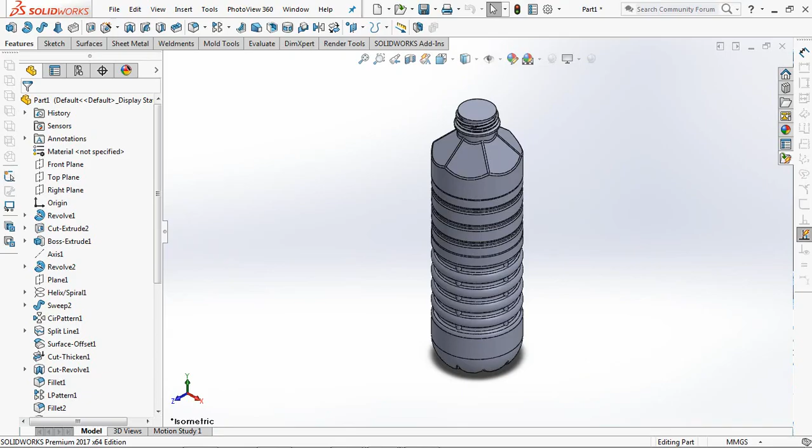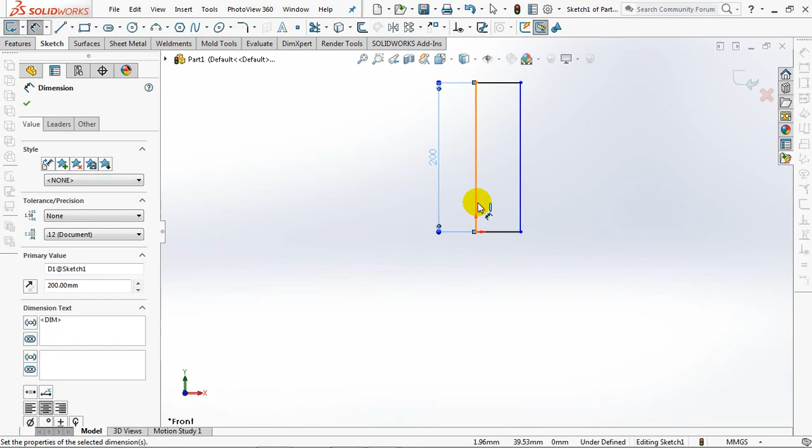Let's get started. On the front plane, choose revolved boss, then create a rectangle. Set height at 200 millimeters and width at 33 millimeters. Change the vertical line at the origin to a construction geometry.

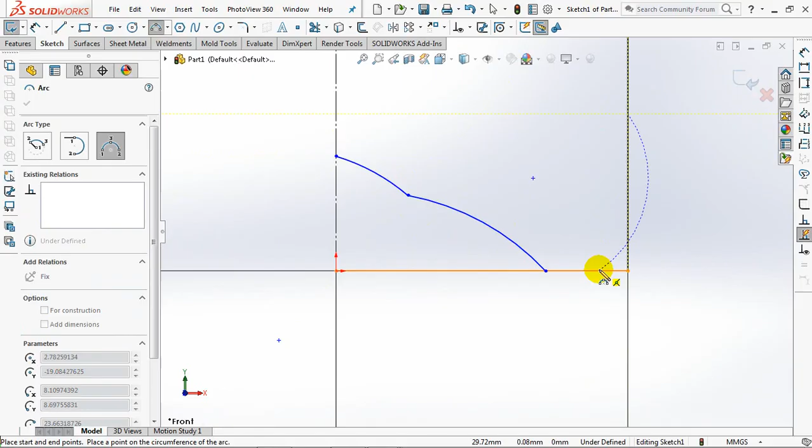Then create an arc profile. Trim some lines. Use the add relation command for arcs and lines to be tangent or coincident.

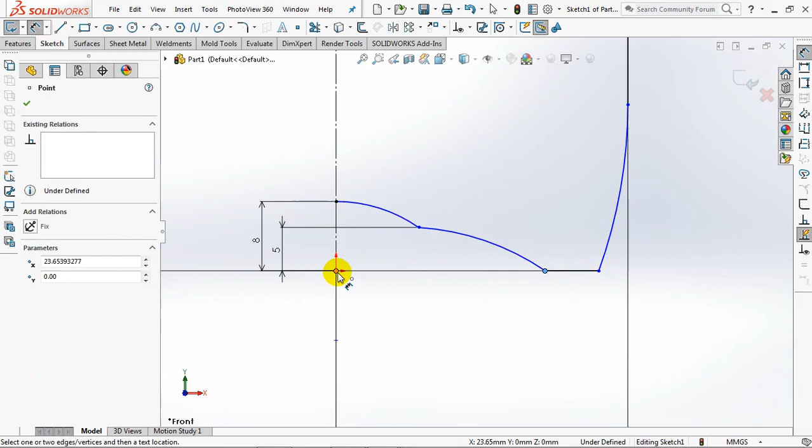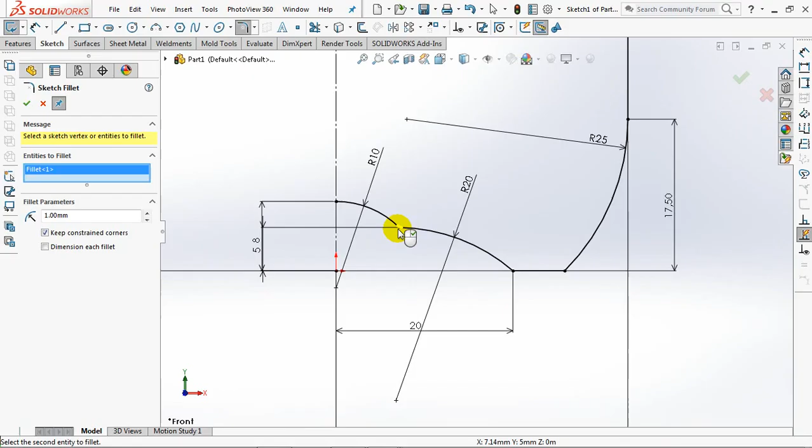Set dimensions at 8 millimeters, 5 millimeters, 20 millimeters, 17.5 millimeters. Radius 10 millimeters, 20 millimeters radius, 25 millimeters radius, as well as the respective fillets, 1 millimeter and 2.5 millimeters.

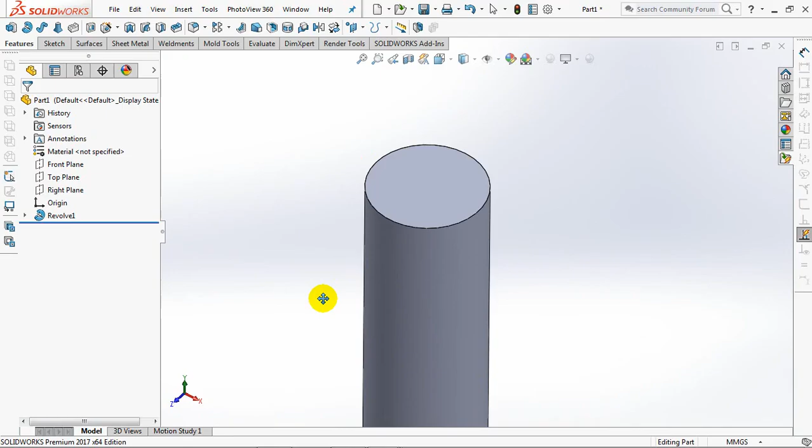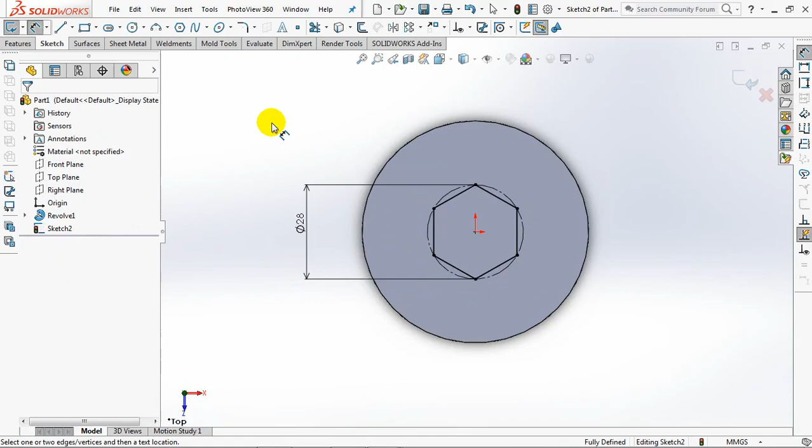Select extruded cut on the top surface. Create polygon profile. Check circumscribed circle, make vertical, set dimensions at 28 millimeters. Exit sketch, select through all.

Check flip side to cut. Click draft angle, set the angle at 45 degrees. OK.

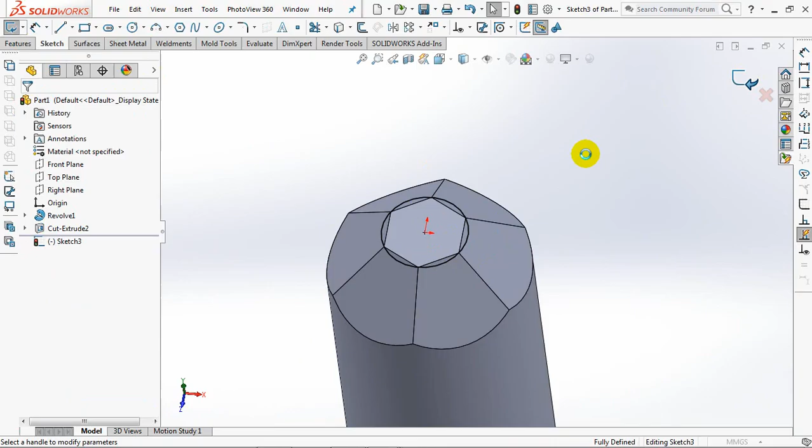On the top surface, select the extruded boss. Sketch a circle 28 millimeters in diameter, then exit sketch. Set depth at 18.5 millimeters. In direction 2, select up to next. OK.

Create an axis. Click the front plane and right plane. OK.

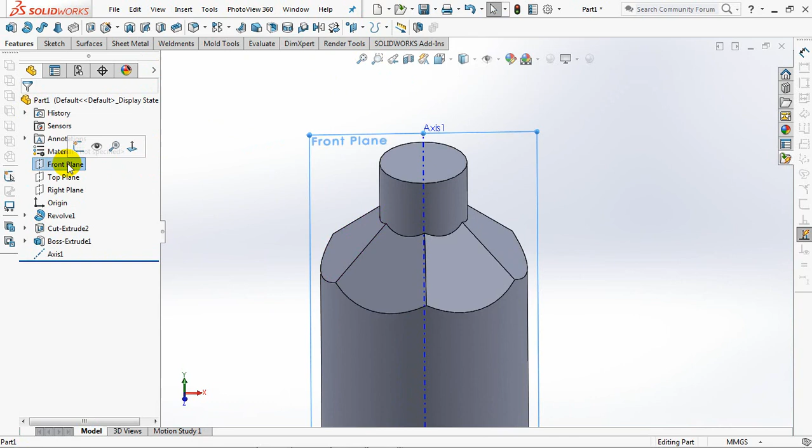Click the front plane, then choose the revolved boss. Create line sketch profile.

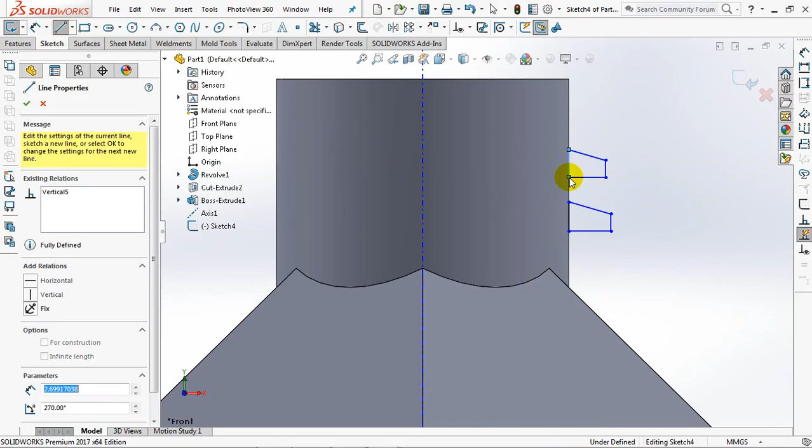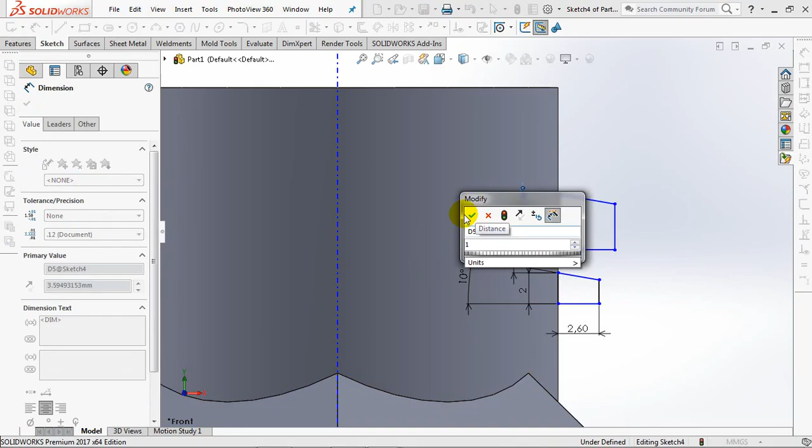Set dimensions at 2 millimeters, 2.6 millimeters, 10-degree angle, 1.5 millimeters dimension, 1 millimeter, 1.6 millimeters, 12.5 millimeters. Exit sketch, click axis as axis of revolution.

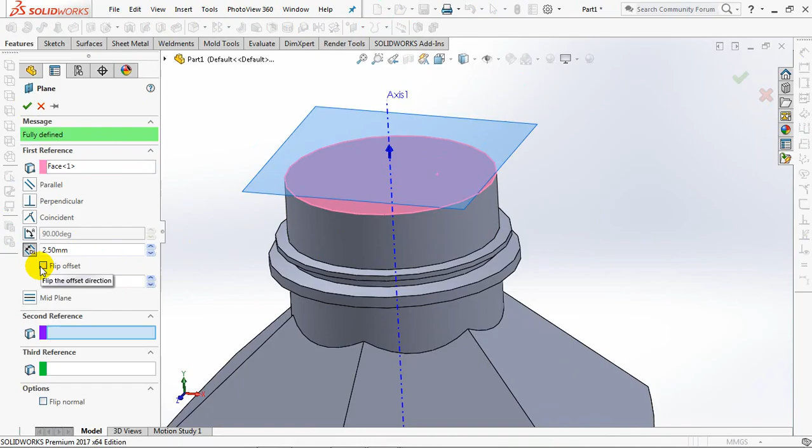OK. Create a new plane on the top surface with a distance of 2.5 millimeters. Then create a helix on the new plane.

Make a circle with a diameter of 25 millimeters. Exit sketch. Check variable pitch. Set region parameter to 8 millimeters pitch, 8 millimeters pitch, 0.05 revolution, 28 millimeters in diameter.

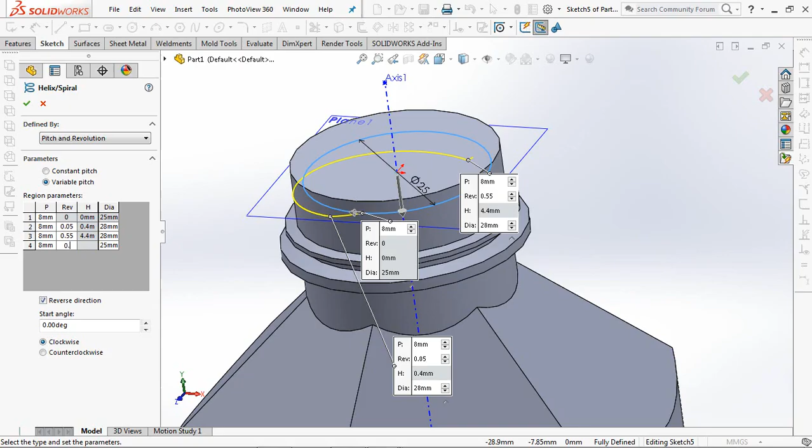8 mm pitch, 0.55 revolution, 28 mm in diameter, 8 mm pitch, 0.6 revolution. OK.

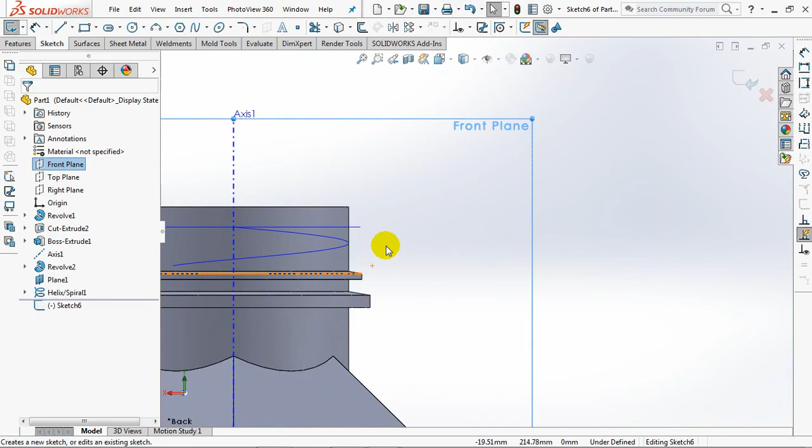Then create line profile on the front plane. Set 60-degree angle.

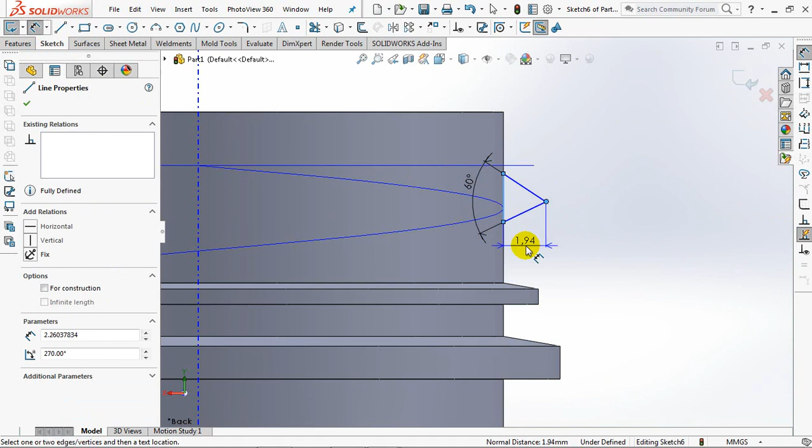1.6 mm wide, 3 mm high, and 1.9 mm thick. Set fillet at 0.25 mm. OK and exit sketch.

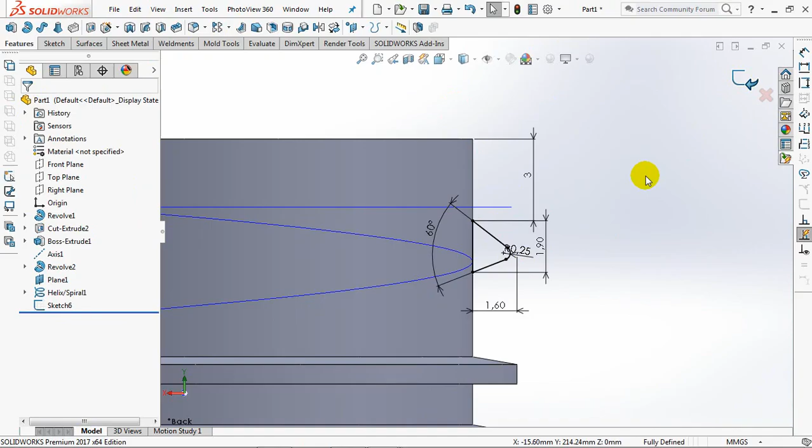Select Sweep Boss. Then click Sketch 6 and Helix Path. Click Bidirectional. OK.

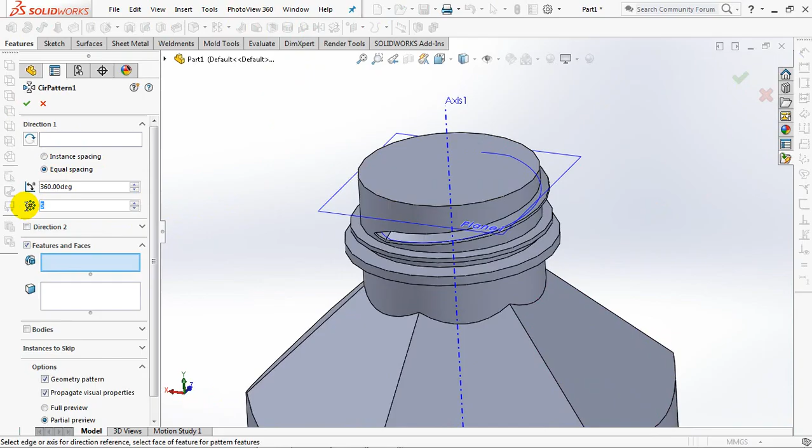Choose a circular pattern, number of instances is 3. Click Axis 1 as pattern axis. Click the Sweep 2 feature. OK.

Hide plane 1, and hide helix. Create a line sketch profile for the split line on the body surface. On the front plane, draw a rectangle.

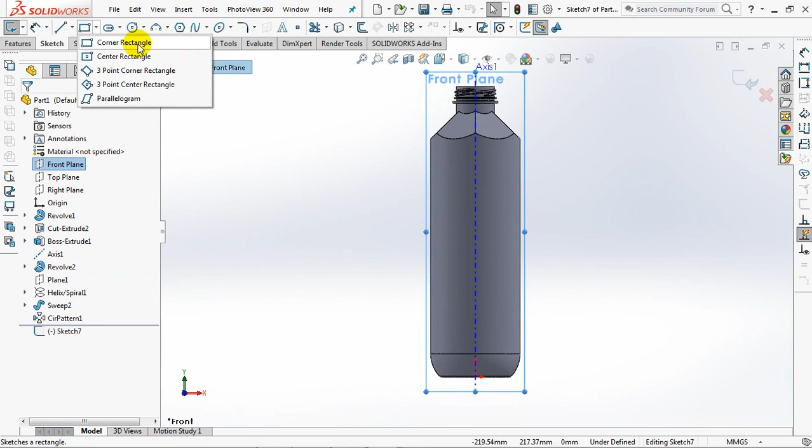Set dimensions at 40 mm and 50 mm. Convert the vertical lines to construction geometry. Exit sketch. Select split line.

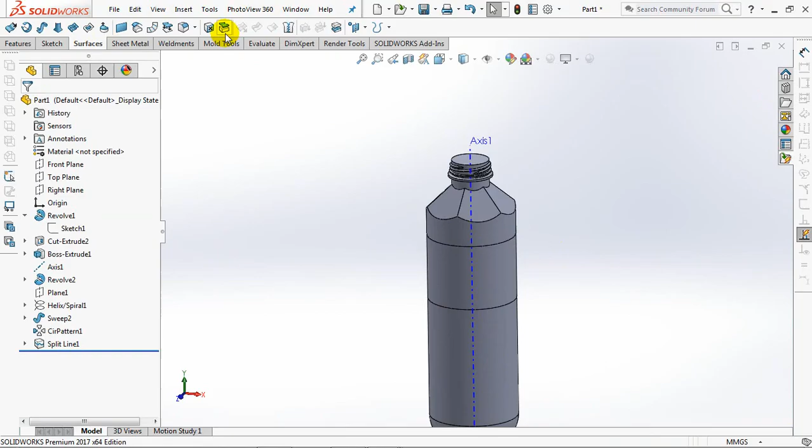Then click the body surface. Offset surface at 0 mm. Then thicken cut at 0.25 mm.

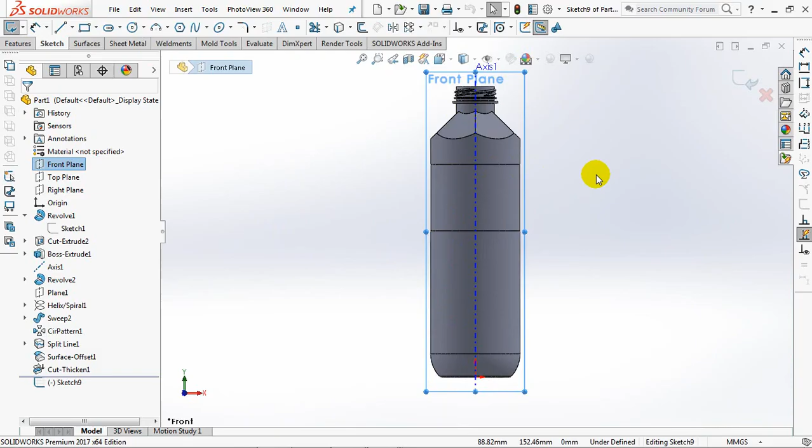Make a revolved cut command on the front plane. Then make a profile of the isosceles triangle line.

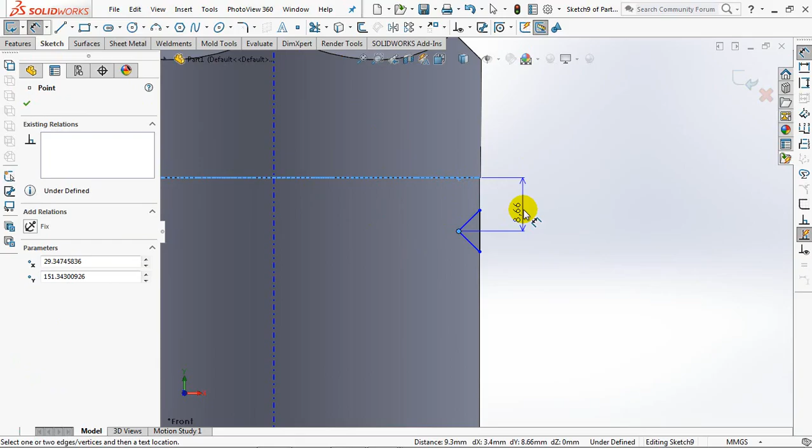Set dimensions at 10 mm, 1.9 mm. Fillet 1 mm. OK and exit sketch.

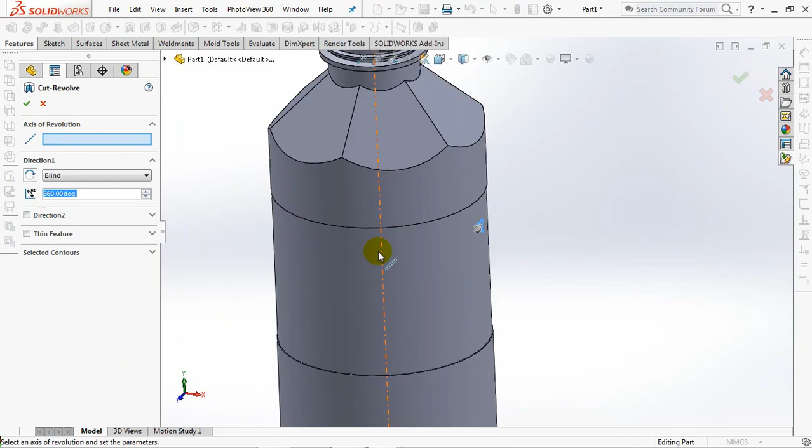Click Axis 1 as axis of revolution. OK. Set fillet at 2 mm. OK.

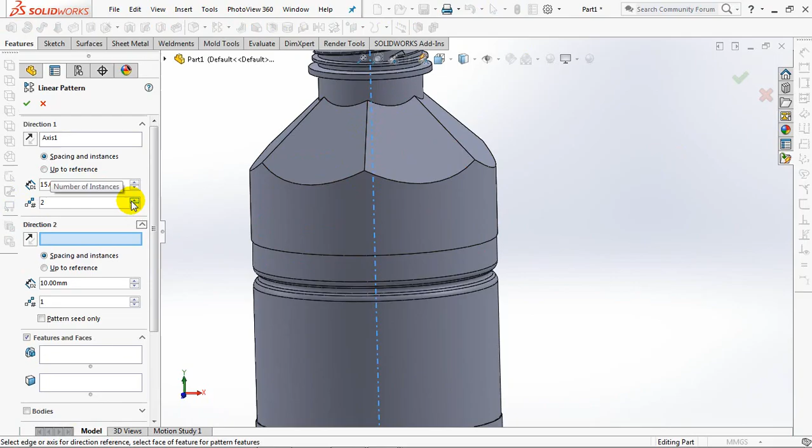Select linear pattern. Click Axis 1. Set spacing at 15 mm. Click the Cut Revolve 1 and Fillet 1 feature. Number of instances at 3. OK.

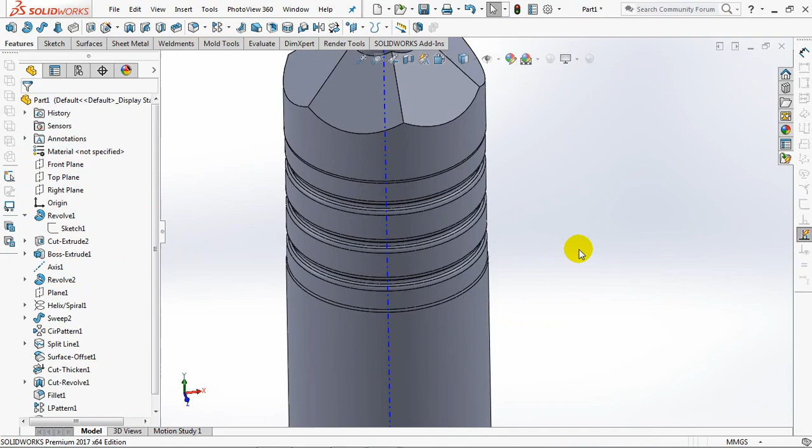Set fillet at 2 mm. OK. Set fillet at 3 mm. Click Edge, then choose Right feature.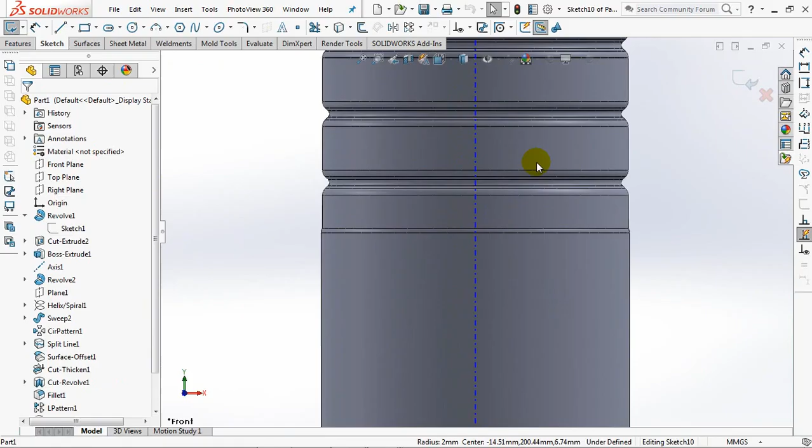OK. On the front plane, select Revolved Cut. Create a triangular profile.

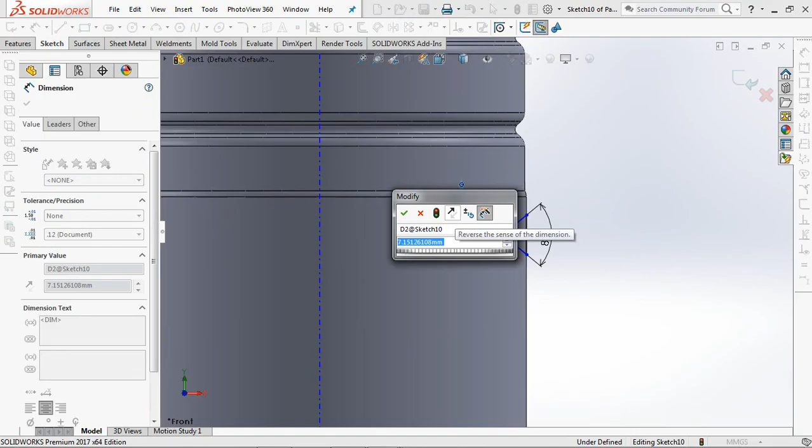Equal. Set the angle at 80 degrees. Set height at 15 mm, width 5 mm. Fillet 2 millimeters.

OK and exit sketch. Click axis 1 as axis of revolution. OK.

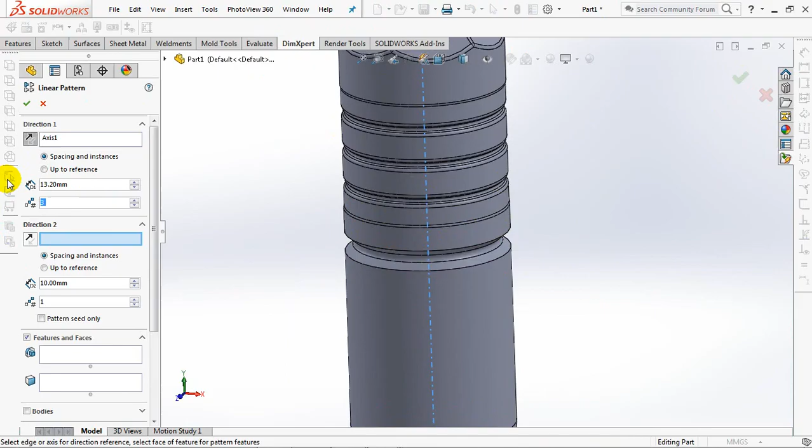Select linear pattern. Click axis 1. Set spacing at 13.2 millimeters. Number of instances at 5. Click the cut revolve feature 2. Click reverse direction. OK.

Set fillet at 4 millimeters. OK.

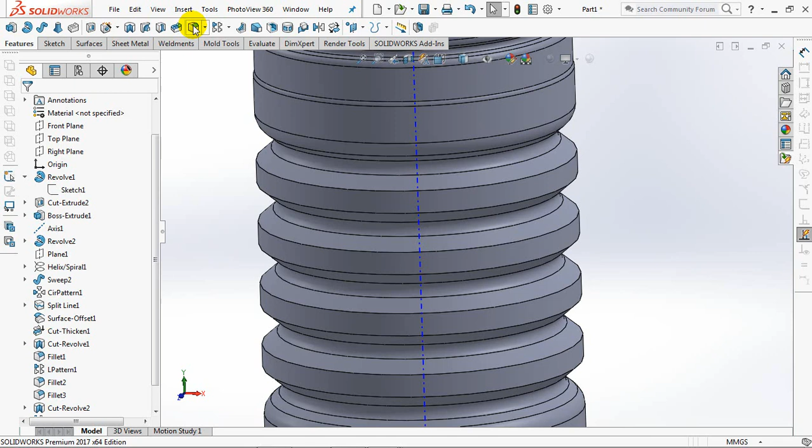Then select fillet, and choose full round fillet. Click each item to fillet. OK. Repeat the fillet command for the remaining 3.

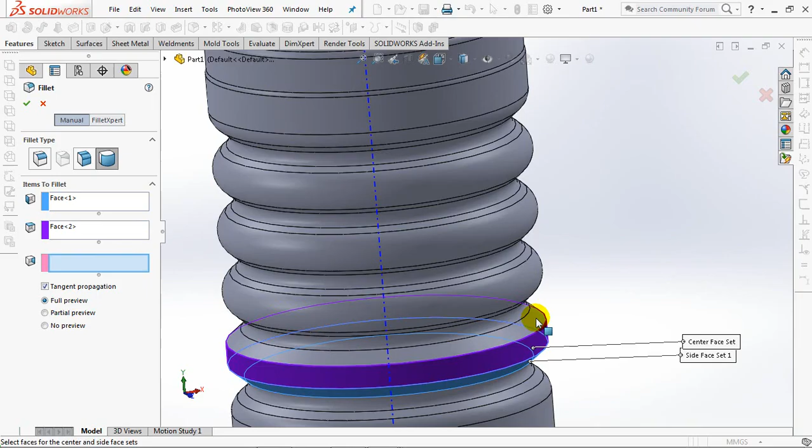Create a path profile on the front plane. Show profile sketch 1. Offset entities at 2.5 millimeters.

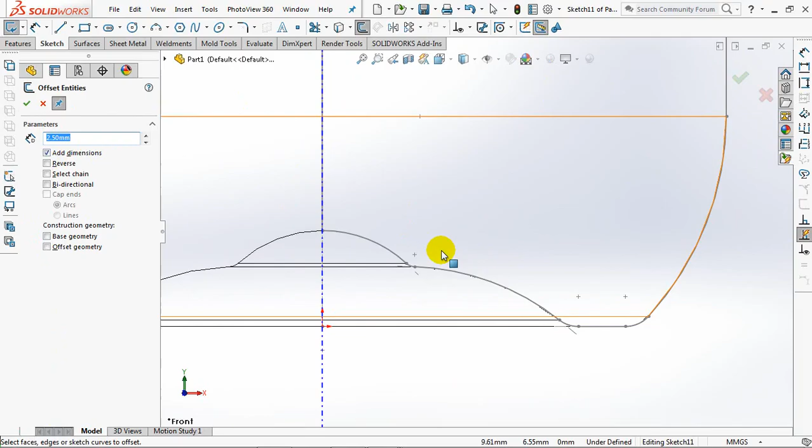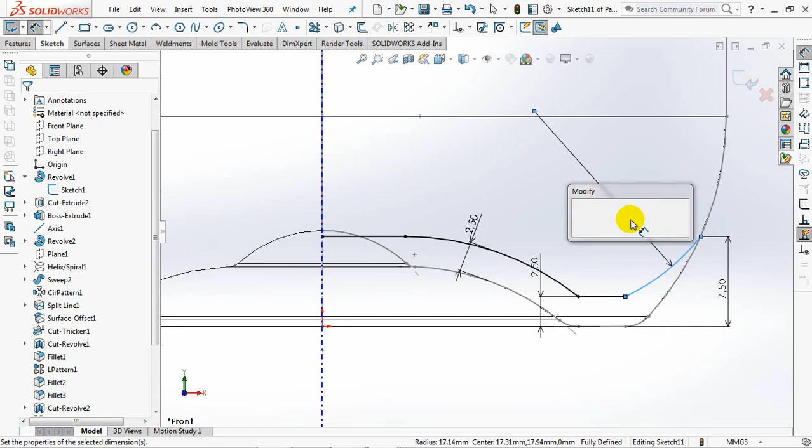Sketch an arc, then sketch a horizontal line. Set dimensions at 7.5 millimeters, 15 millimeters radius. Fillet 1 millimeter. OK, then exit sketch.

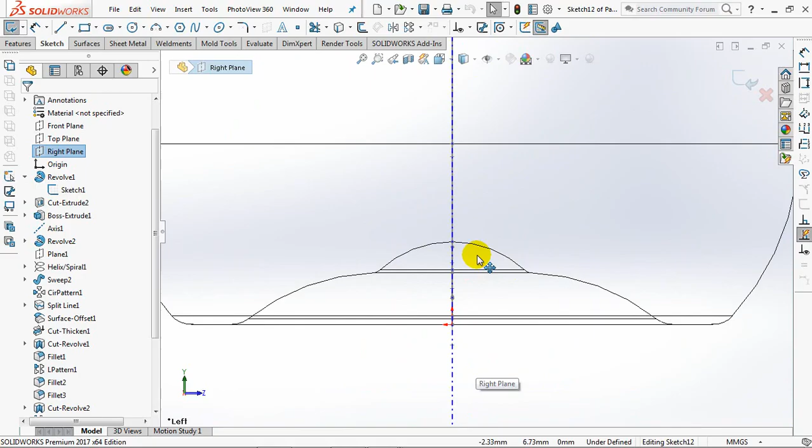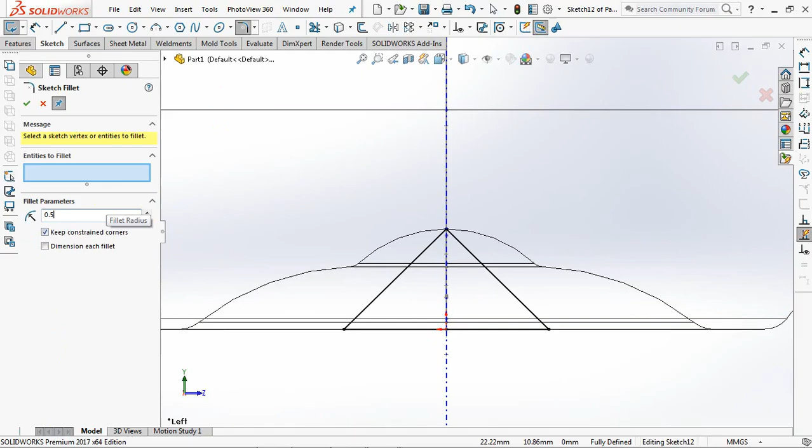Create an isosceles triangle profile on the right plane. Equal. Set fillet at 0.5 millimeters. OK, exit sketch.

On the feature toolbar, select Sweep Cut. Then click the path for Sketch 11. OK.

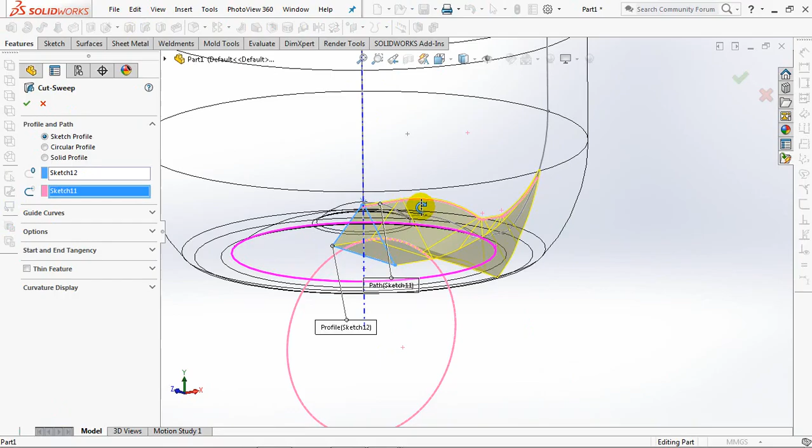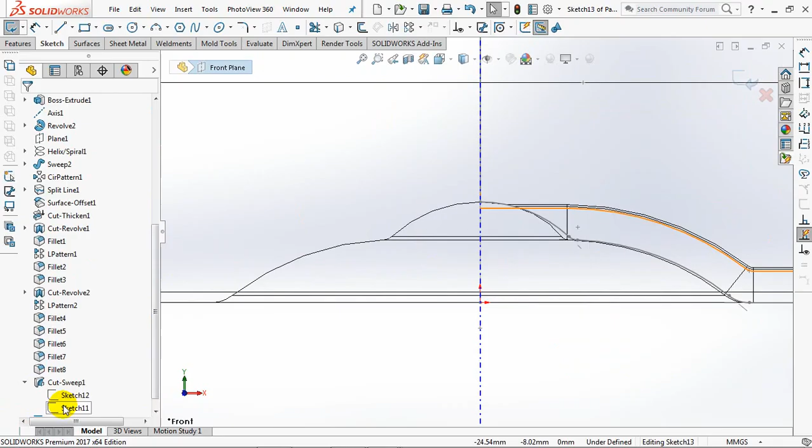Create another path profile on the front plane. Click Sketch 11, then select Convert Entities. Create the center line as the mirror axis.

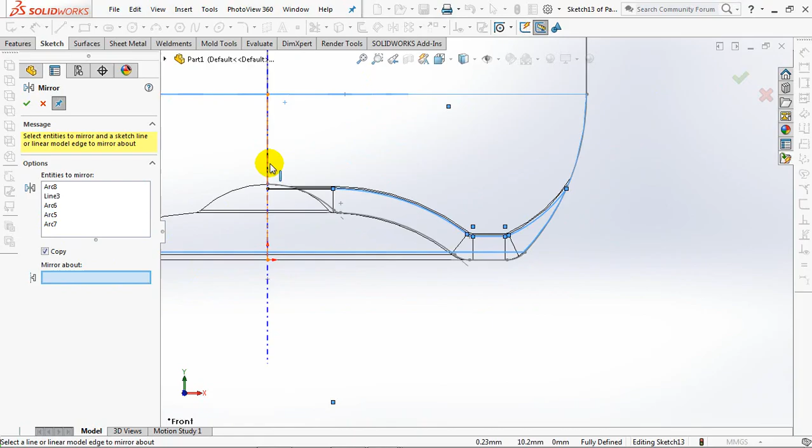Choose the Mirror command. Click Entities to mirror. Then click the center line as the mirror about. OK. Change to construction geometry.

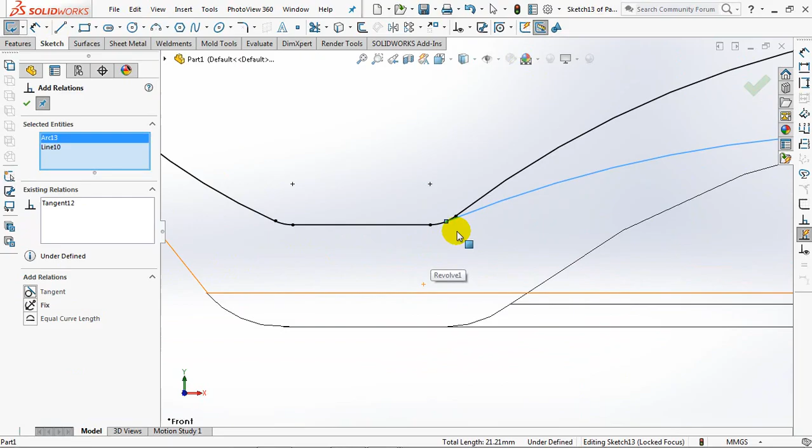Sketch an arc and lines. Add relation, becomes tangent. Set dimensions at 5 millimeters. Trim to closest. OK and exit sketch.

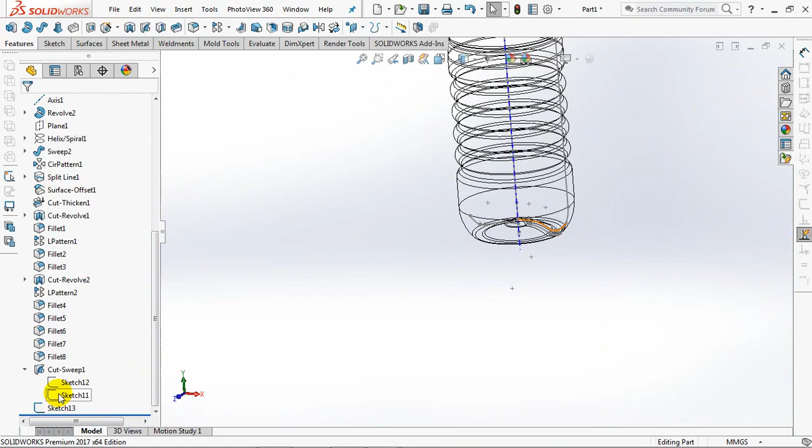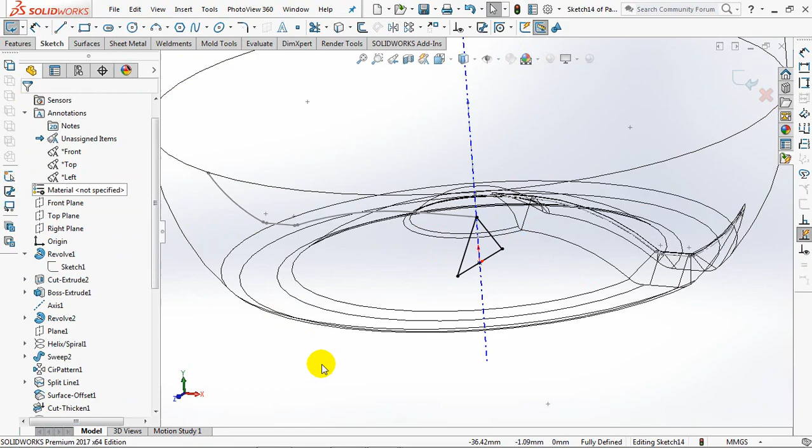Create an isosceles triangle line profile on the right plane. Set 0.5 millimeters fillet. OK, then exit sketch. Choose a sweep cut. Click sketch 13 as a path. OK.

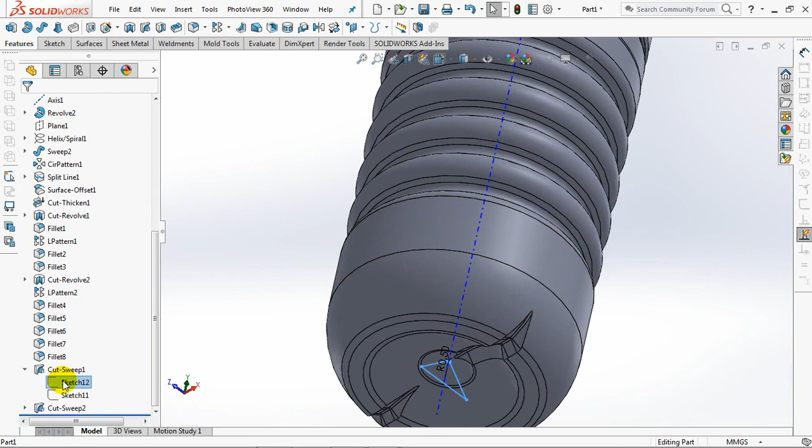Show sketch 12. Then create a new plane. Click the first reference and second reference. Set the angle at 55 degrees. OK.

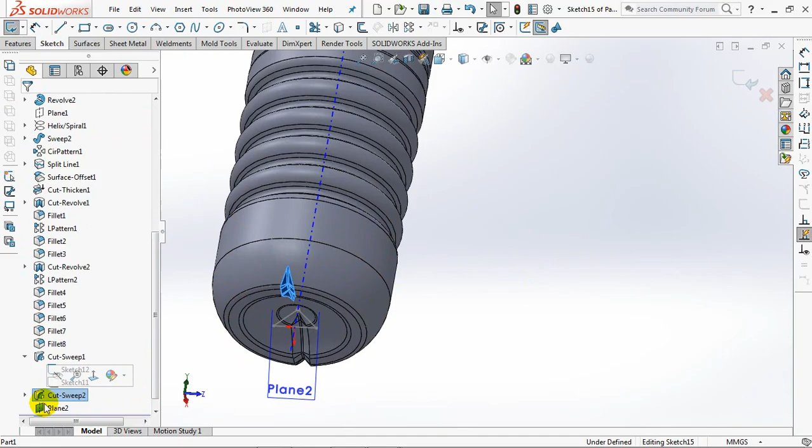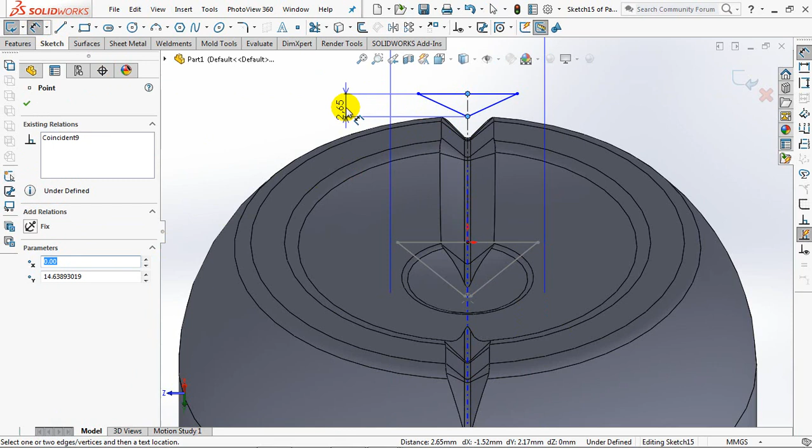Create a profile on the new plane. Centerline and line. Set dimensions at 2.65 millimeters, 150 degrees, 15 millimeters. Exit sketch.

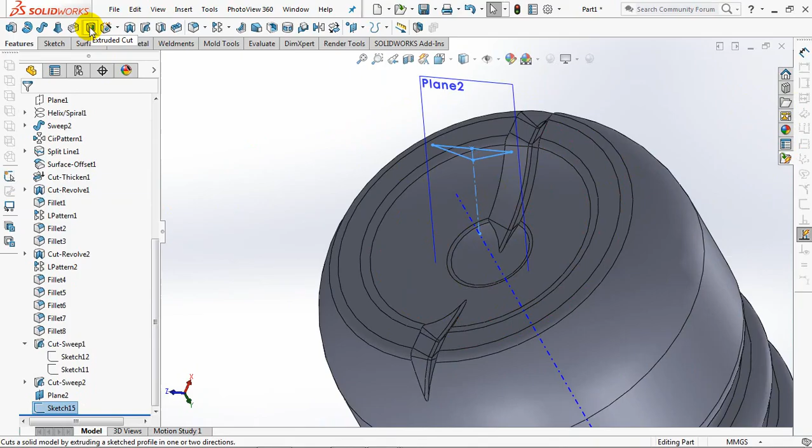Click sketch 15, then select extruded cut. Choose through all. OK.

Roll back. Choose a circular pattern. 5 instances. Click the cut sweep 2 and cut sweep 1 features. Click axis 1. OK.

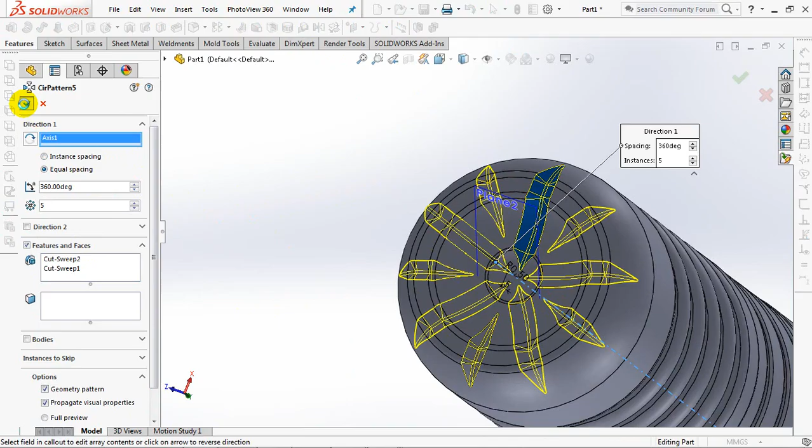Roll to end. Then choose the circular pattern again. 10 instances. Click the cut extrude feature 3. Click axis 1. OK.

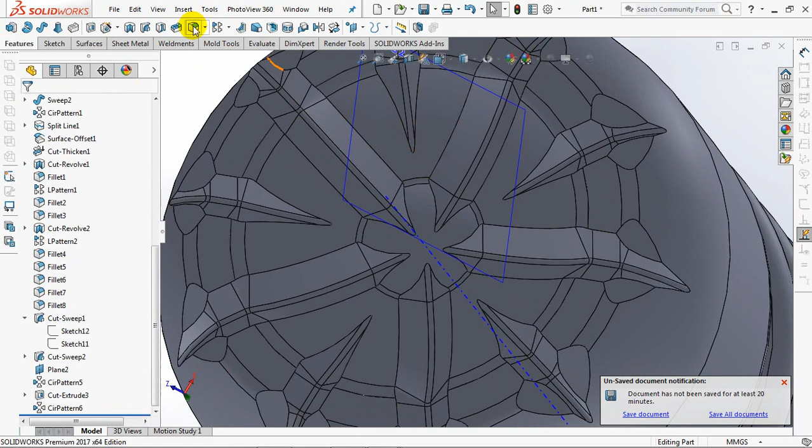Fillet 1 millimeter. Click edge, and choose virtual left face. OK.

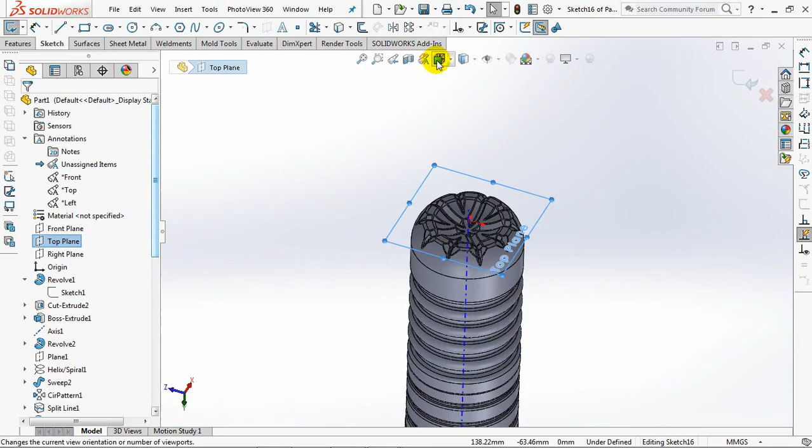Hide plane 2. Create a circle sketch profile on the top plane. Centerline. Then a circle of 5 millimeters diameter, 0.28 millimeters radius. Exit sketch.

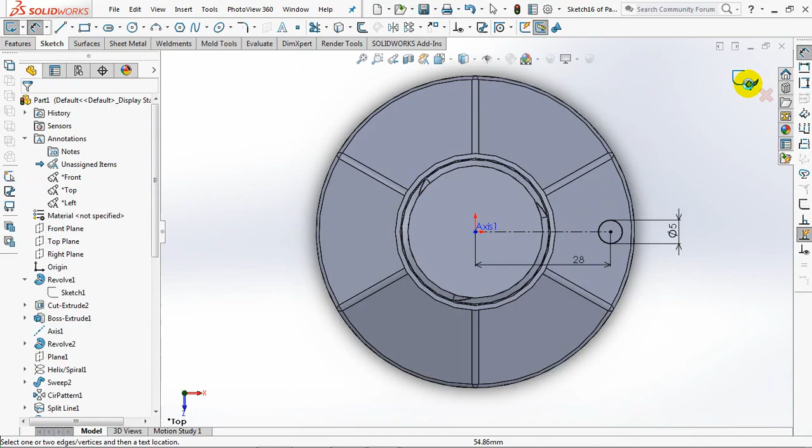Choose the extruded boss. 30 millimeters offset, up to surface. Click the face. OK.

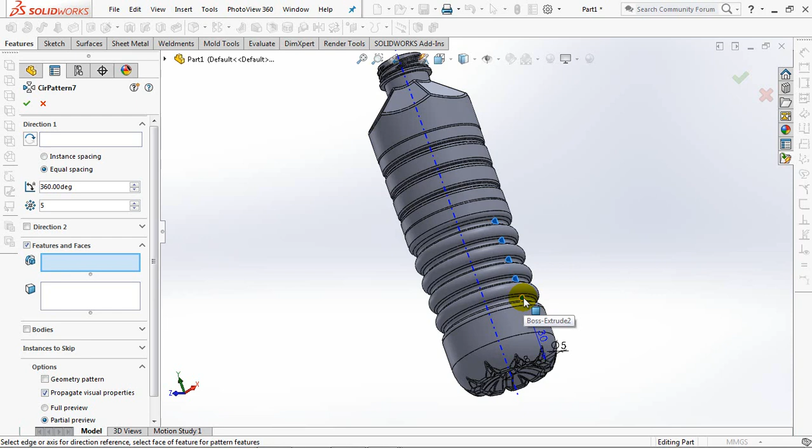Choose circular pattern. 5 instances. Click the boss extrude 2 feature. Click axis 1. OK. Hide axis 1.

OK, done. If you have questions, please write in the comments column.